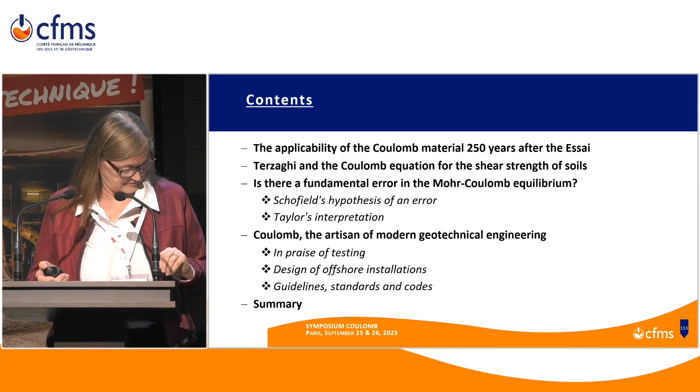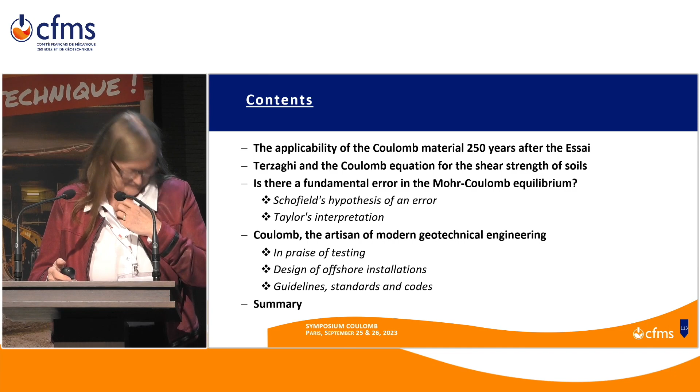So the plan of presentation: I will have a few words on the applicability of the Coulomb material 250 years after the essay, and how Terzaghi verified this. It's an old document that I found at NGI. Then I was always a bit disturbed by the fact that it has been published that there was a fundamental error in the Coulomb equation, so I will discuss this. And then finally, I call Coulomb the artisan of modern geotechnical engineering, with some examples or illustrations of where it's in our practice today.

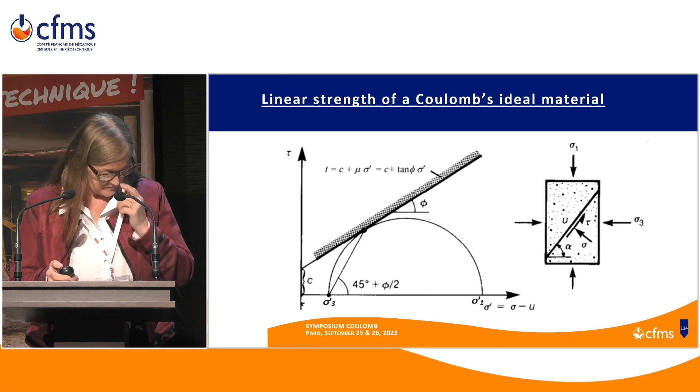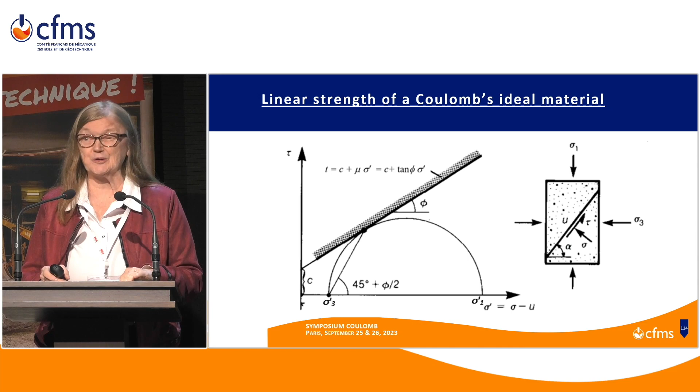So this is the basic Coulomb equation, and it's not an original figure, it's a fairly old figure you can see. And it's quite simple. It has cohesion, it has the friction angle phi. And the definition of cohesion, as it's given in physics, because Coulomb was a physicist, is the act or process of sticking together tightly, or it's the molecular attraction by which the particles of a body are united throughout the mass. So Coulomb was a physicist who discovered the laws that govern magnetic attraction and repulsion and invented the torsion balance.

So can he also still be shaping the geotechnical engineering of today? He presented his essay in 1773 on some statical problems. It's a happy coincidence, in a way, that this 250th anniversary of the Coulomb essay is also the 100th anniversary of the principle of effective stress that was proposed by Karl Terzaghi in his 1923 German version of soil mechanics. In English, it came in 1925.

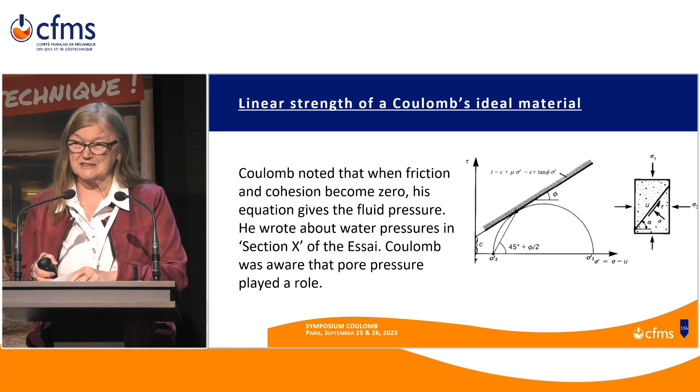And Coulomb noted that when friction and cohesion become zero, his equation gives the fluid pressure. He wrote about water pressure, although it's not in his equation, in section 10 of the essay. So he was aware that pore pressure played a role. But in those days, remember it's 1773, Coulomb did not have adequate apparatus for the measurement of cohesion or pore pressure, because Collin was the first to publish measurements of undrained shear strength in 1846, 75 years later.

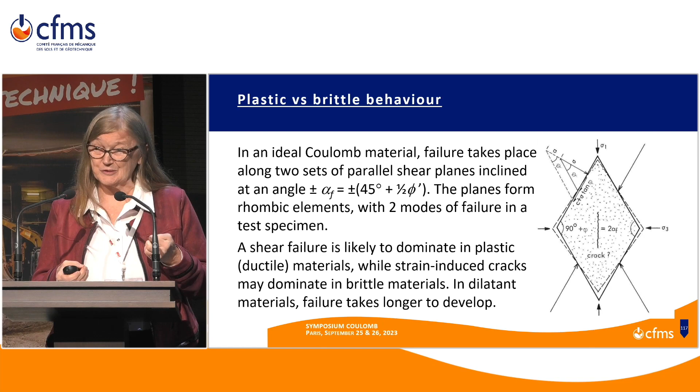So in an ideal Coulomb material, failure takes place along two sets of parallel planes, inclined at an angle, as shown here, alpha plus or minus 45 degrees plus half phi. The planes form rhombic elements with two modes of failure in a test specimen. A shear failure is likely to dominate in plastic ductile material, while strain-induced cracks may dominate in brittle materials. So in dilatant materials, failure may take longer to develop.

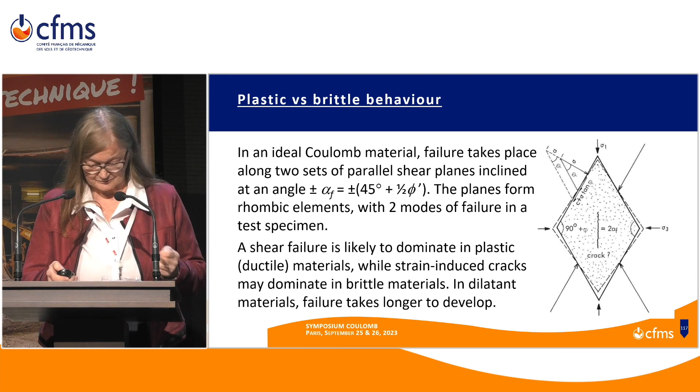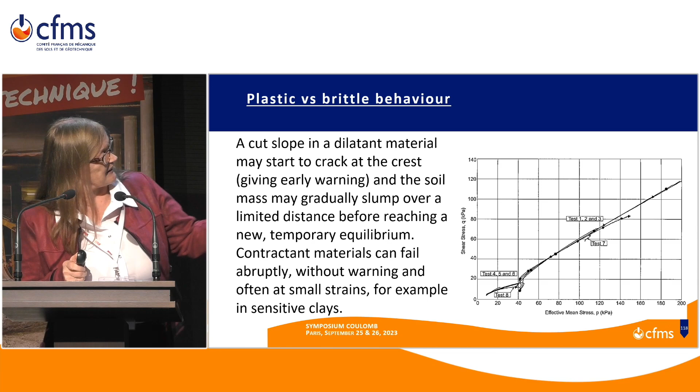This, I believe, is the precursor to our stress path shown here for contracting material. The contractive material is the one going down, the stress path going down, and the dilating material is the stress path going up. This is a modern test from around 1980.

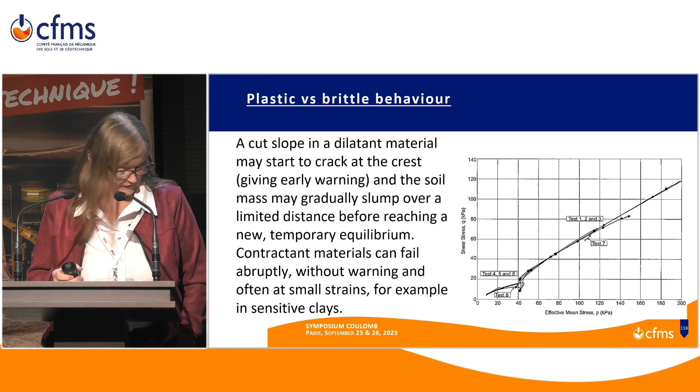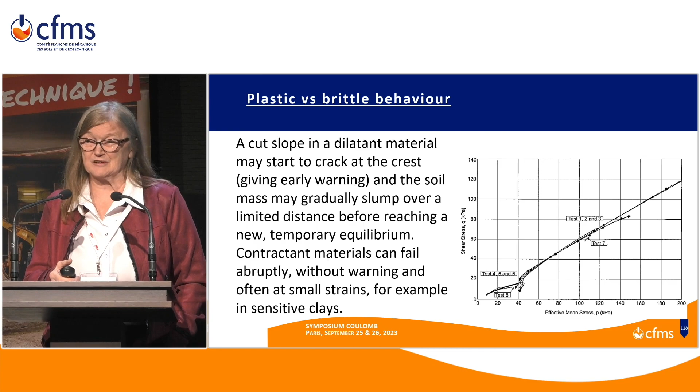A cut slope in a dilating material may start to crack at the crest, giving early warning, and the soil mass may gradually slump over a limited distance before reaching a new temporary equilibrium. Contracting material, on the other hand, can fail abruptly, without warning, often at small strain, for example sensitive clay. Coulomb already hinted about that in talking about his materials.

This is a landslide that occurred in Norway in 2020, where 10 people died. Definitively contracting material. I don't have to show you, but you can see the landslide which took so many houses. Already in the Coulomb theory, we could see the contours of modern geotechnics.

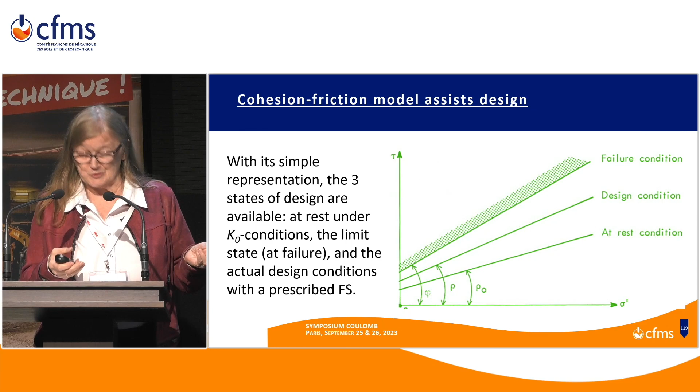The simple model of Coulomb is very useful just to see how things behave. So the three states of design in practice that we have are easily represented: you have the at-rest condition, which is the lower line, then the failure envelope, which is the upper line, and then the design condition. All of these are represented with straight lines. We know it's not exactly a straight line, but it's a very good tool to teach and to represent what is happening.

Now, Terzaghi, who we all know was a determined person, decided to verify the equation of Coulomb. This is data that we had at NGI from a course by Terzaghi in 1935, which you may know he legated all his material to NGI.

Bjerrum in 1959 found this and translated it from German to Norwegian, and I translated it to English. So this is data that has not been published before, which was very nice to find. That's the usefulness of libraries. Young people, libraries are great.

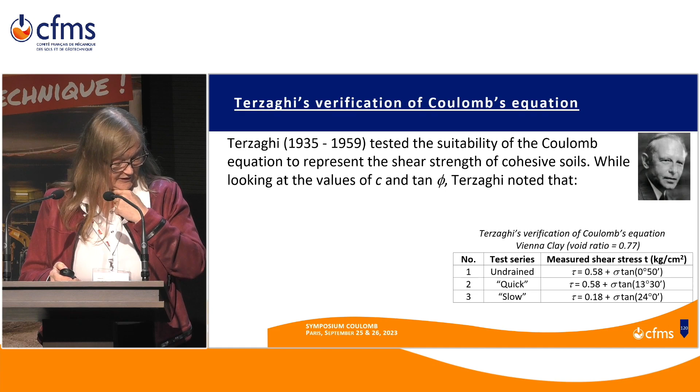He tested the suitability of the Coulomb equation to represent the shear strength of cohesive soil. These are the results he obtained, part of the result. He had three sets of tests: one completely undrained, one quick—like what we call the Q test, old-fashioned test—and a very, very slow test to represent drained condition.

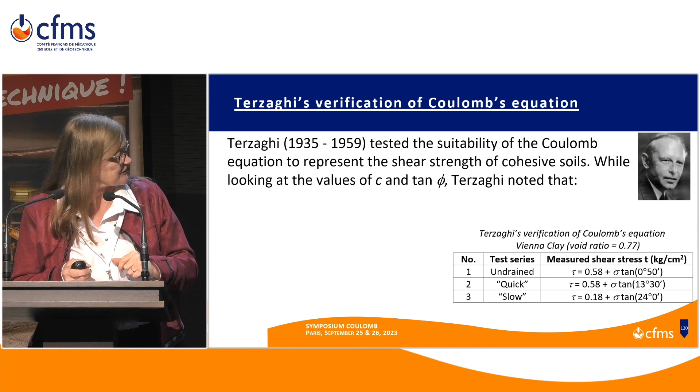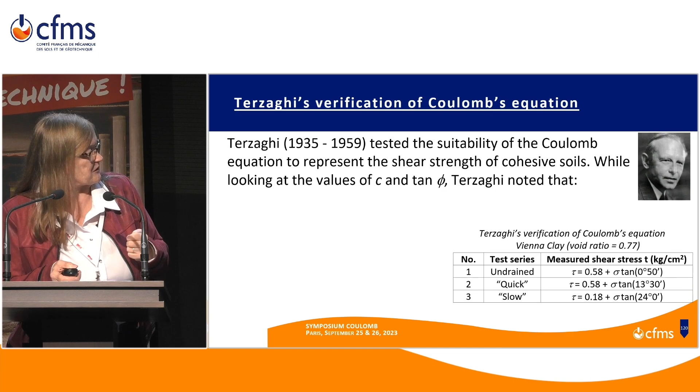Lo and behold, he obtained equations similar to Coulomb's. By this time, the T had become a tau and the S had become a sigma, but it's the same equation with different friction angle measures. In those days, they measured friction angle very precisely.

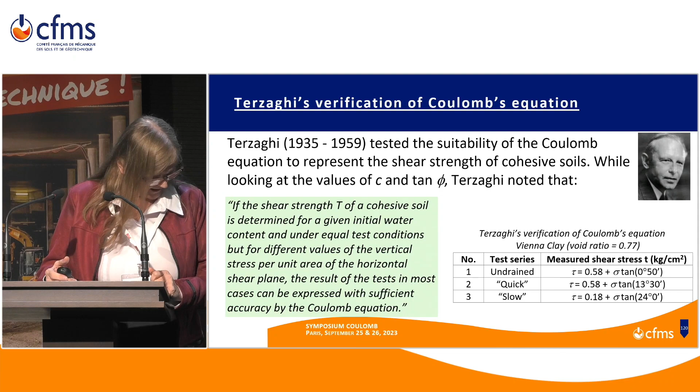Terzaghi noted—this is a quotation from his German report, translated to Norwegian to English—'If the shear strength T of a cohesive soil is determined for a given initial water content and under equal test conditions, but for different values of the vertical stress per unit area of the horizontal shear plane, the results of the test in most cases can be expressed with sufficient accuracy by the Coulomb equation.'

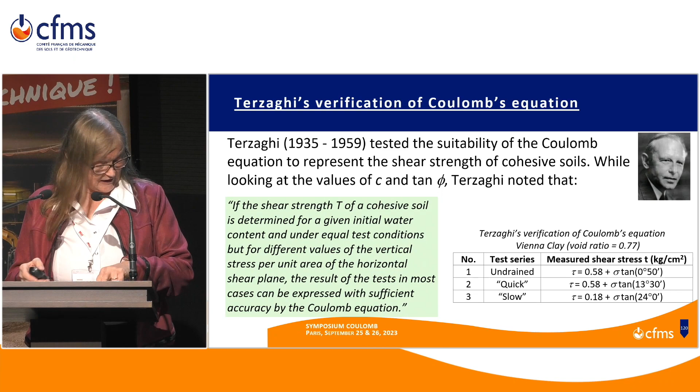So this was the verification by Terzaghi of the Coulomb theory. But now intervenes strength anisotropy.

Terzaghi observed that the most important difference in the tests was the extent to which the void ratio was allowed to adapt itself to the change in stress on the sample. If this adaptation was not fully completed, part of the force on the specimen was carried by the pore water pressure, or an increased pressure in the pore water.

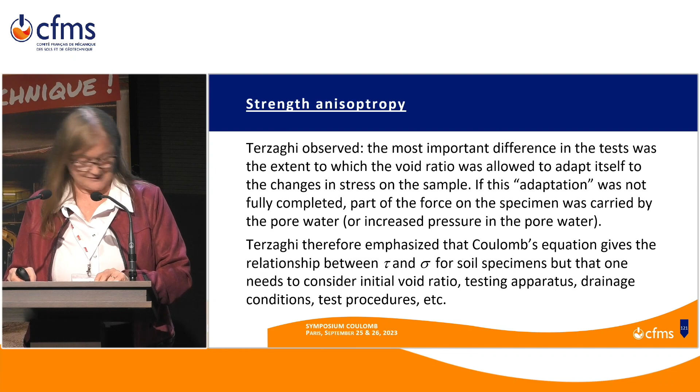Terzaghi therefore emphasized that Coulomb's equation gives the relationship between tau and sigma, or T and S, for a soil specimen, but that one needs to consider initial void ratio, testing apparatus, drainage condition, test procedures, etc., whatever else may come.

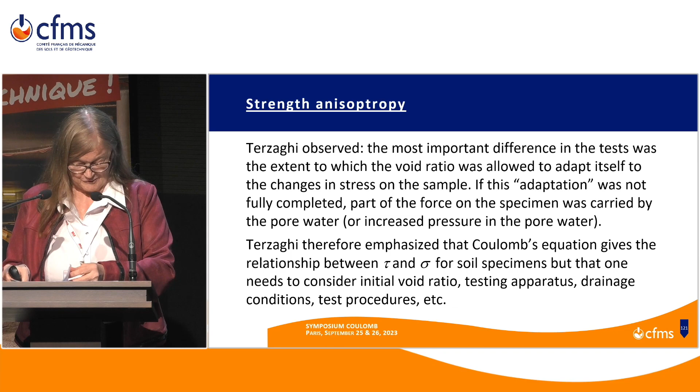Thereby, using Coulomb's law, Terzaghi introduced the concept of stress-induced and inherent anisotropy for clays already in the 1930s.

Coulomb provided the general relationship for shear resistance. The practitioner—you and me—the theoretical modeler, the researcher, they still have to determine which test conditions are the relevant ones. This is still true today, and this is probably one of the major mistakes we make in design.

Now that I'm older, when I mentor young people, I often ask them: how did you obtain the shear strength? And sometimes somebody answers me, 'Oh, I just got it from Wikipedia.'

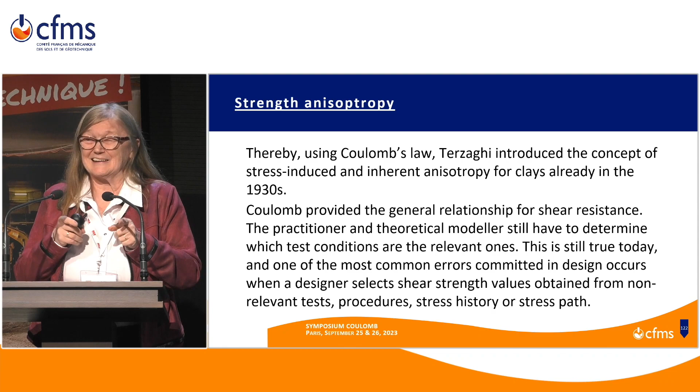So that didn't pass. But choosing the Coulomb values C and phi have to be related to what you're trying to model. It's important with the relevant test, the relevant procedure, and the stress history or stress path.

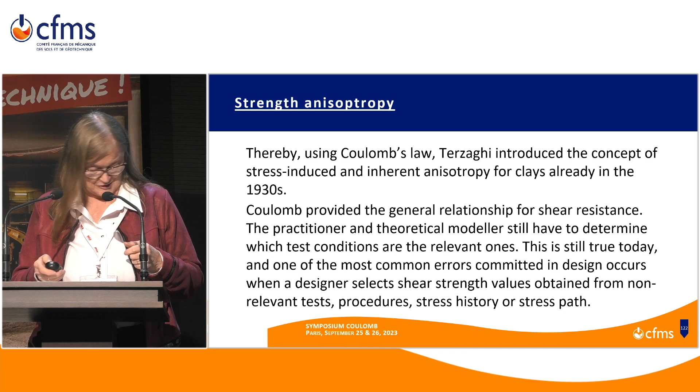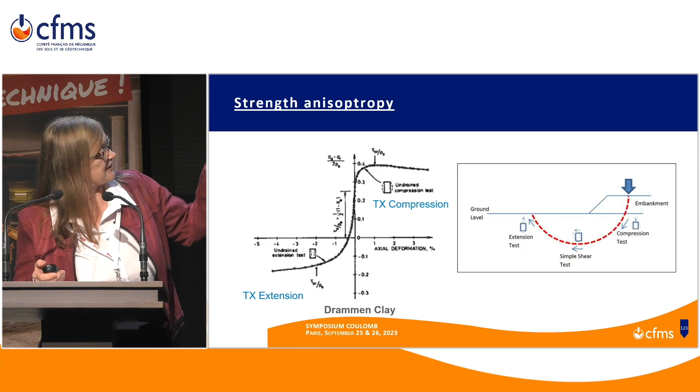And this is a very classical way of analyzing an embankment, where we model the circular slope failure in this case with the triaxial extension test, triaxial compression test, and simple shear test. They also follow Coulomb's law, but the parameters are not the same because of different stress paths.

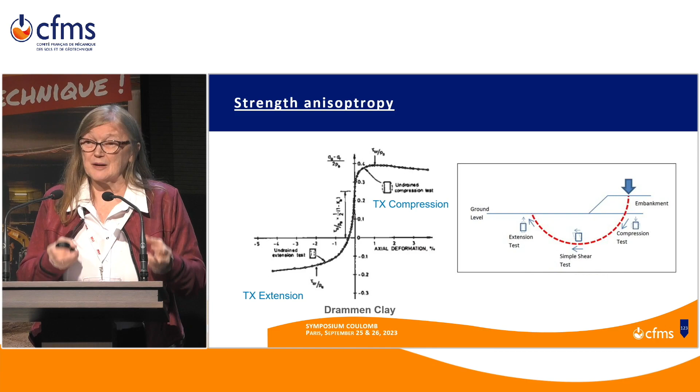Terzaghi in 1935 even suggested adding an index to make it very clear that the validity of Coulomb's equation depends on the conditions analyzed.

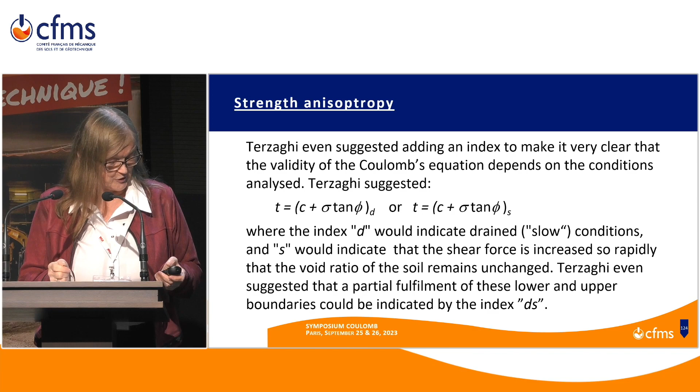Terzaghi suggested the Coulomb equation with a D would indicate drained or slow tests, and with an S it would indicate that the shear force is increased so rapidly that the void ratio of the soil remains unchanged. He even suggested an index DS for the condition in between.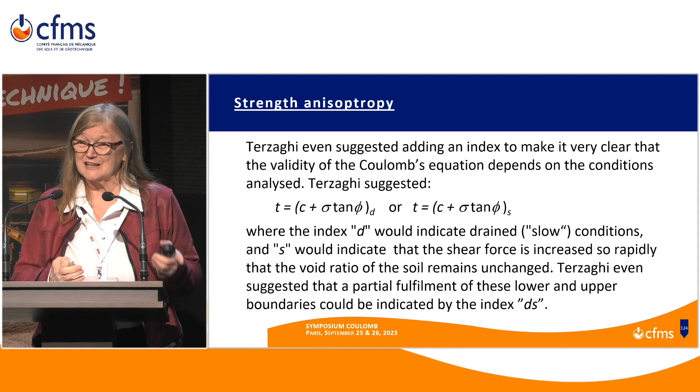Now, maybe the profession should have followed this, because today this is one of the things we often mix up in practice.

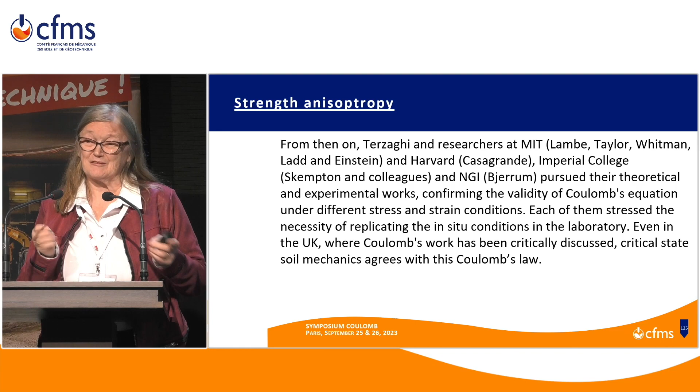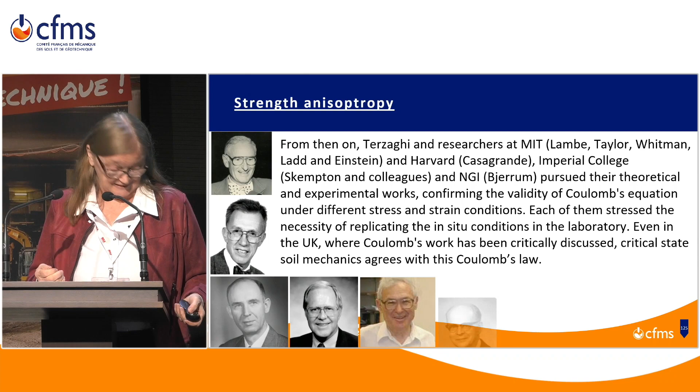From then on, Terzaghi and researchers at MIT—this is not complete, but I use my background, where I was educated and the people I talked to—so there was Lambe, Taylor, Whitman, Ladd, Einstein, and at Harvard, Casagrande, and then at Imperial College, Skempton. They followed these tracks and did a lot of experimental work to check or confirm the validity of Coulomb's equation under different stress and strain conditions.

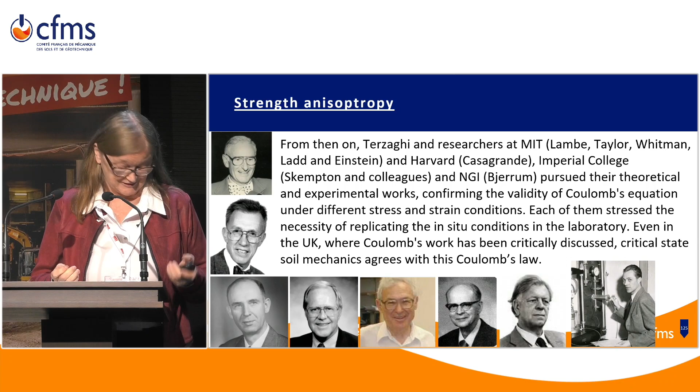Each of them stressed the necessity of replicating the in-situ condition in the laboratory. Even in the UK, where Coulomb's work has been critically discussed, which we will see afterwards, critical state soil mechanics agrees with this Coulomb law.

So I will look into it: is there a fundamental error in the Mohr-Coulomb equilibrium? I will present the hypothesis of an error, which was based on the Taylor text, what Taylor said, and then my own conclusion on the error.

Schofield, in 1998 and 2005 and other publications, suggested that the error rests on the observation that Coulomb's equation omits a component of strength called interlocking. The interlocking refers to the term mentioned first by Taylor in his 1948 book and in some lectures before that.

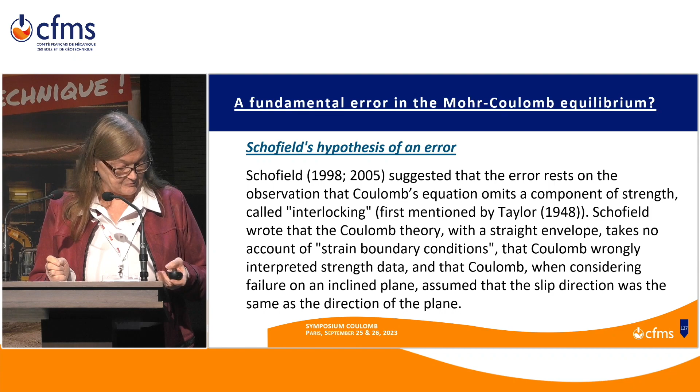Schofield wrote that the Coulomb theory, with a straight envelope, takes no account of strain boundary conditions, and that Coulomb wrongly interpreted strength data to get the straight line, and that Coulomb, when considering failure on an inclined plane, assumed that the slip direction was the same as the direction of the plane.

Schofield used as argumentation that Taylor's tests showed that the peak strength of the sand was equal to a combination of an angle of friction plus a term of interlocking. And Schofield added: mistaking interlocking for cohesion.

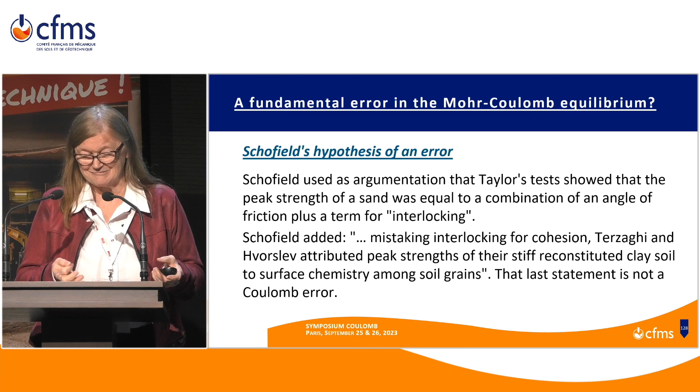Terzaghi later, and Hvorslev even later, attributed peak strength of their reconstituted stiff clay to surface chemistry among soil grains rather than real friction. But that last statement is certainly not a Coulomb error—it would be an error of Terzaghi's or Hvorslev's.

But what did Taylor say in 1948? This is a poor drawing, but it's taken from the original Taylor book, the very first, which was handwritten, where he illustrates his check of the Mohr-Coulomb line. And then you have the figure there, and below the figure is his original caption.

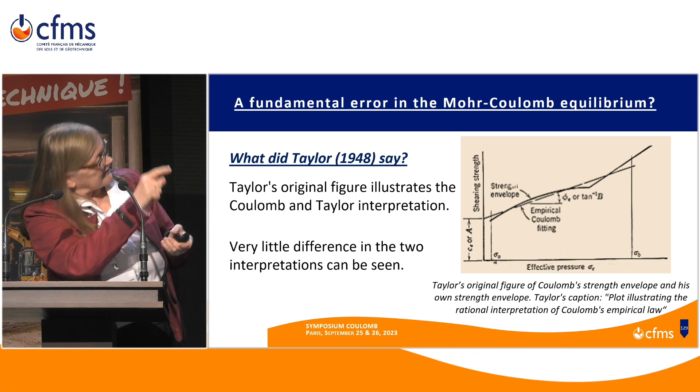He said: plot illustrating the rational interpretation of Coulomb's empirical law. The law by Coulomb is the dashed line, the straight line, whereas his test on the sand is a curved line that goes a bit up, a bit bizarre at the top. And I find the two lines are really quite close.

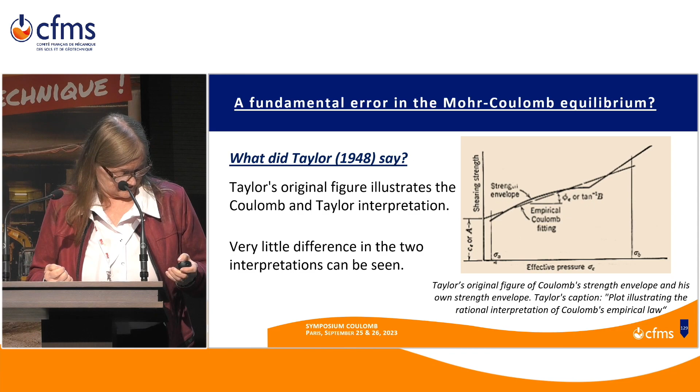So in his text, Taylor agrees with Coulomb. Taylor did not describe Coulomb's theory as an error.

On the contrary, Taylor called the Coulomb parameters empirical coefficients and mentioned that different conditions should be accounted for by the engineers using the Coulomb equation. He added: curves of the Coulomb type are representative of the strength of a given soil when it has been subjected to a given magnitude of precompression. At different depths in a deposit, there usually are different amounts of precompression, thus a different envelope may hold for different depths. So he was already talking of using Coulomb, but in a normalized manner in terms of effective stresses.

Okay, try this. Okay?

My interpretation is that Taylor's paragraph validates Coulomb's strength theory. There are two recent papers, one in 2015 by Christian Becker and one by Burland in 2008, and they reiterate the same. I've put their pictures here. You might not know them, but everybody knows John Burland. They reiterate that Taylor's concept of interlocking is not inconsistent with Coulomb's theory, but complementary. It's a sign of progress.

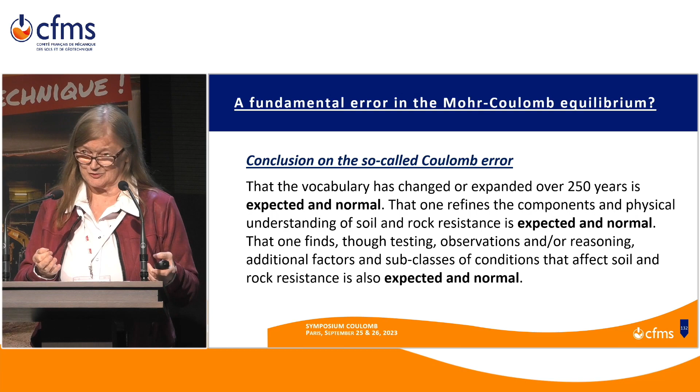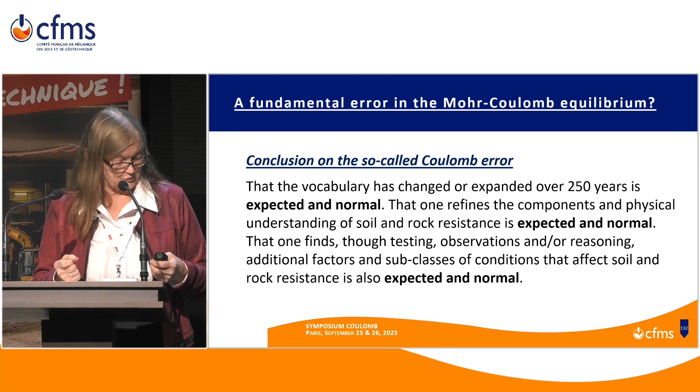So my conclusion on the so-called Coulomb error is that the vocabulary has changed or expanded over 250 years, which is expected and normal. That one refines the components and physical understanding of soil and rock strength and resistance is also expected and normal—it's 250 years, we have to do some progress. And that one finds through testing, observation, or reasoning additional factors and subclasses of condition that affect soil and rock resistance is also expected and normal.

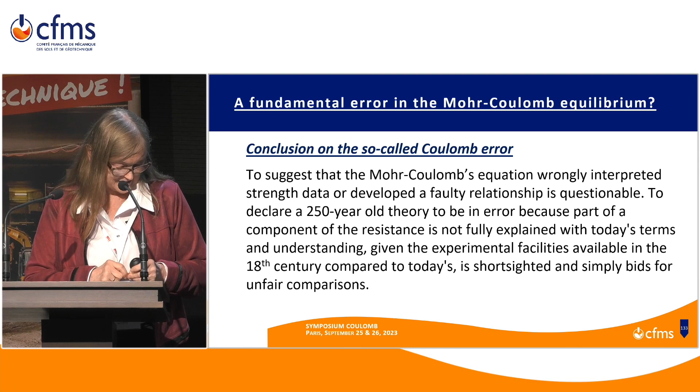So to suggest that the Mohr-Coulomb equation wrongly interpreted strength data and developed a faulty relationship is, in my mind, questionable. To declare a 250-year-old theory to be in error because part of a component of the resistance is not fully explained with today's terms, and the understanding has changed, and given the experimental facilities available in the 18th century, I think is not a fair assessment of what Coulomb said in 1773.

Another conclusion I have is that Coulomb's principle was the precursor for developing the tools to meet the engineering profession's responsibility of ensuring the safety of people and preserving material property and the environment. Through Coulomb's theory, the engineer can become intimate with the foundation soil and continue to rely on experience and peer review.

And simple hand calculation—I'm all for finite element, etc., but with this you can do some simple calculation and check that you're in the right order. So in my mind, Coulomb, without doubt, laid the groundwork for the understanding of soil and rock resistance.

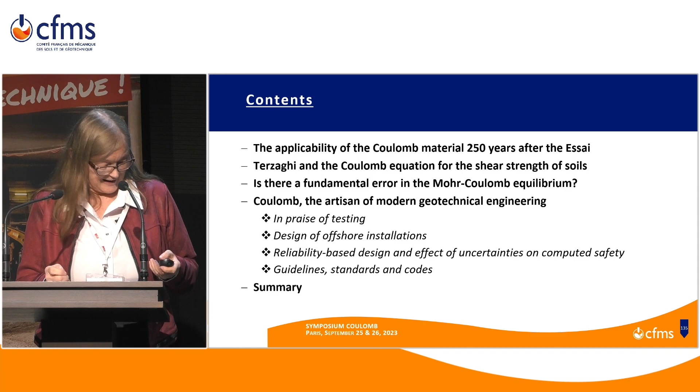Now, just a few examples of how Coulomb is influencing today's practice. Well, the profession has greatly evolved—100 years after the statement of effective stress, and the principle of effective stress really changed soil mechanics.

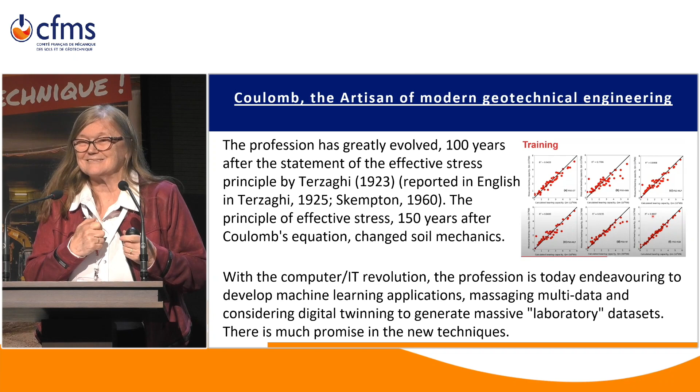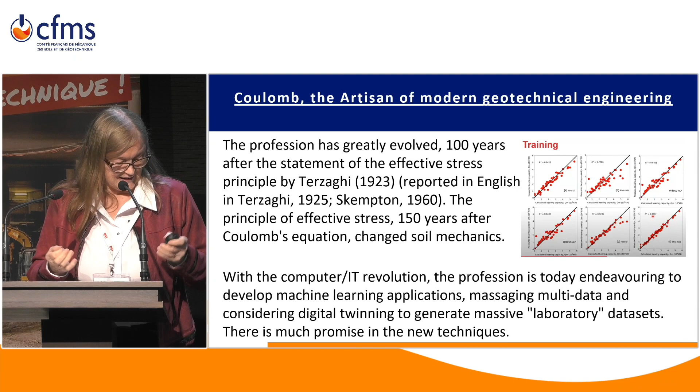With the computer and artificial intelligence revolution, the profession is today endeavoring to develop machine learning applications and massive multi-data sets and everything. I myself am involved in that. There's an example of training a machine learning model—that's all right, but still it's not the whole story. The data will still have to observe Coulomb's law.

The profession is undergoing a paradigm shift from dedicated verifiable data towards vast numbers of measurements in anonymous distributed systems, like for example digital twins in the laboratory. These new developments will be helpful, but the fundamentals must not be forgotten. So observing Coulomb's principle remains an absolute requirement for the teaching and practice of engineering. Fundamental understanding should not take a back seat to numerical development and AI interpretation. I'm not against it, I just say you have to also keep the principles.

So Coulomb's equation has found applications in everything we do. I've taken four examples, and the first is in praise of testing, laboratory and in-situ testing. Coulomb was an experimental scientist. He wrote about friction and cohesion, and he also wrote that only experiment can help us to decide the reality of the different causes of shear resistance.

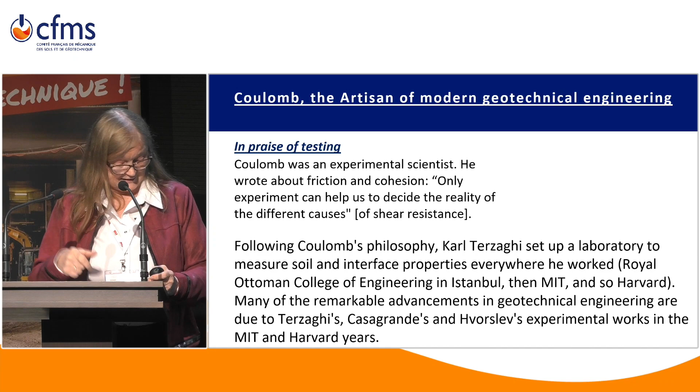We can't compare, we can't with justice say Coulomb was wrong when we can use such facilities. So, but if only clay deposits could talk, like the Atchafalaya clay, that's a very soft clay in the United States, and the New Orleans flood protection levee foundation, or the sensitive clays in Norway, in which you saw a landslide, they would tell us how important it is to thoroughly understand the geology and the stress history of a deposit, and then apply Coulomb's equation.

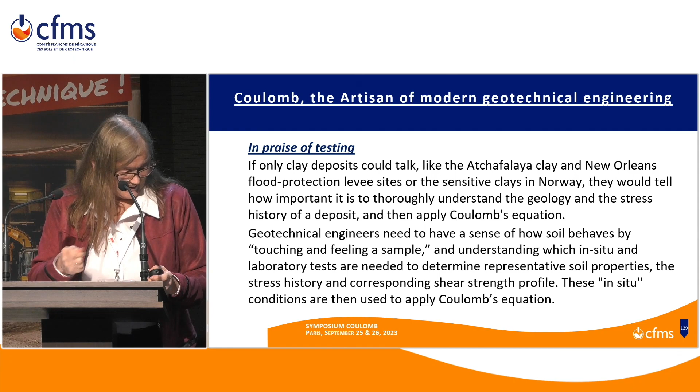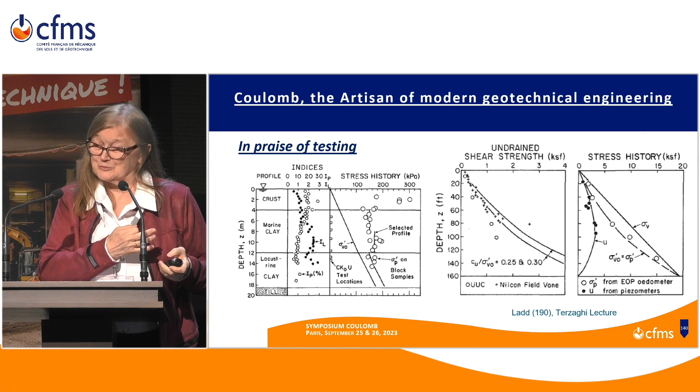So I took an illustration from Chuck Ladd, who was my advisor, from his Terzaghi lecture, where he very carefully plotted all the data by hand, and then looked at the stress history, the effective stress, and what was the pre-consolidation stress, and then interpreted the shear strength profile. And that, I think, is good practice, even with all the good things we do with the computer.

The second aspect, design of offshore installation. You may not know, but I've worked many, many years with offshore structures, the gravity base and the pile foundation, and now with windmills. And the yield stress design of Coulomb is also part of the solution for newer foundations like these, although many new factors come in, but that's all right. That's the advancement of our science.

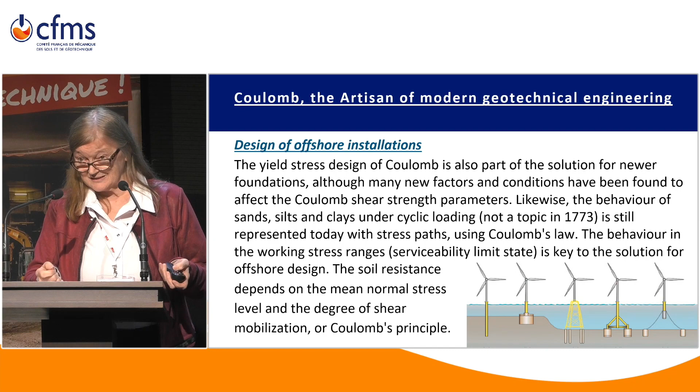So the behavior of sand, silt, and clays under cyclic loading, it was not a topic in 1773, but is still represented today with stress paths, with C and phi, and we use Coulomb's law. The behavior of the working stress range, what we call serviceability limit state, is key to the solution for offshore design. And the soil resistance depends on the mean normal stress level and the degree of shear mobilization using Coulomb's principle. And it's probably difficult to read, but there's a part in the essay that I believe is the precursor for reliability-based design and the effect of uncertainties on the computed safety.

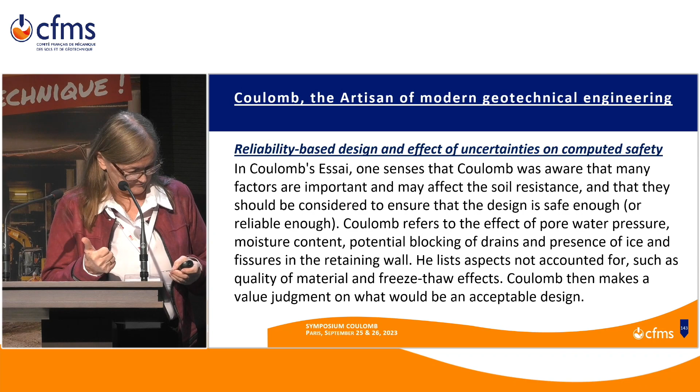So this is an excerpt of a translation by Heyman in 1972, and I have taken some parts of it. In his essay, one senses that Coulomb is aware that many factors are important and may affect the soil resistance, and that they should be considered to ensure that the design is safe enough, or today we would say reliable enough. Coulomb refers to the effect of pore water pressure, moisture content, potential blocking of drains, that's very important for landslides, presence of ice and fissures, it was for a retaining wall.

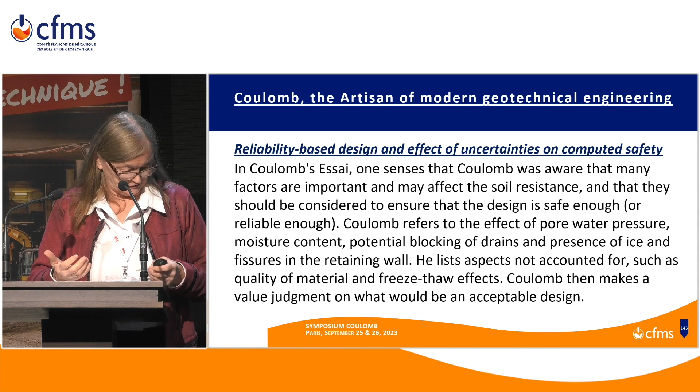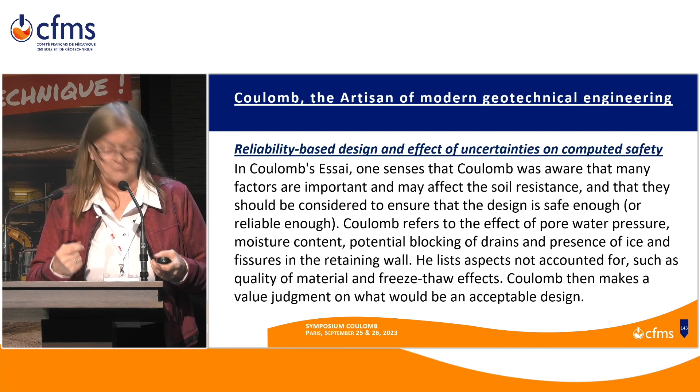And then he also lists the aspects that are not accounted for, like the quality of the material that's recovered, the freeze-thaw effect, and even the model that's used to calculate it. And that's in 1773. So if you read the text, he's already talking about reliability and how good is your calculation. So in his method, Coulomb makes a value judgment of what should be an acceptable design.

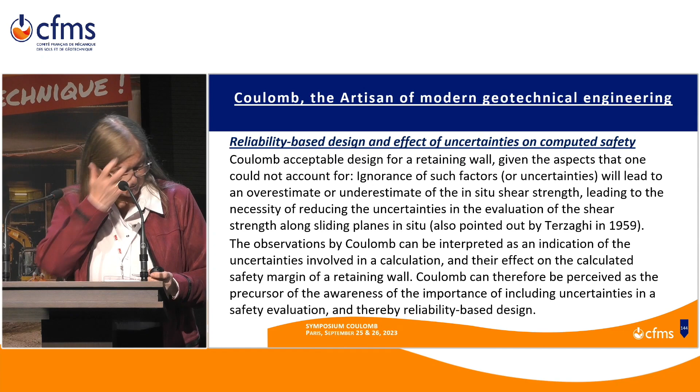So his acceptable design, given the aspects that one cannot account for, ignorance of, or uncertainties, that would lead to an overestimate or an underestimate of the in situ shear strength, and then leading to the reduction of the uncertainty for the safety factor. The observation by Coulomb can be interpreted as an indication of the uncertainties involved in the calculation and their effect on the calculated safety margin of a retaining wall.

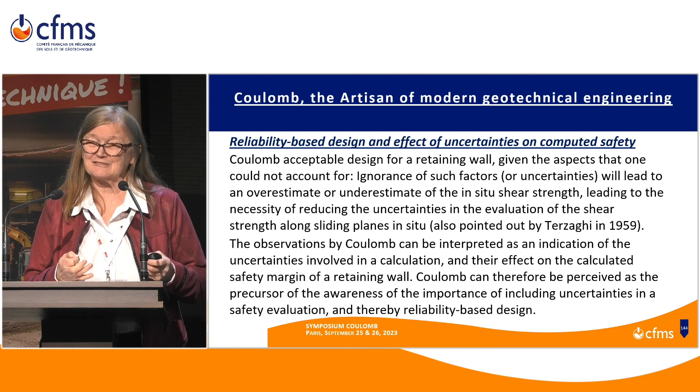So, at least as I read the document, I find it a confirmation that they knew that there were many other things that one should account for. And I am very impressed because that's what we're trying to convince clients about when we do reliability design today.

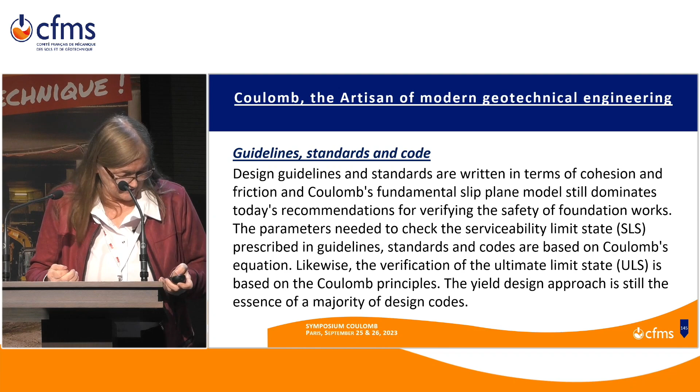And in standards and guidelines, they also use many of the concepts of Coulomb, and many of the requirements are expressed in terms of friction and cohesion. Naturally, they say you have to look at the stress system, whether it's a horizontal failure or a 45-degree failure. But that's all right. Coulomb gave us the first idea, and then we completed it with new knowledge.

Ce mémoire n'était d'abord destiné qu'à mon usage particulier - only for me, says Coulomb - dans les différents travaux dont je suis chargé par mon état. Si j'ose le présenter à cette académie - he wanted to give his knowledge to other people to move forward with it. So I think that was very noble.

So the value of Coulomb's work lies not only in the groundbreaking discovery he did in the 18th century, but mainly in the development to which this discovery led us over the next 250 years. All the work that we've done is a consequence of him stating the equation first. He probably did not foresee the significance of his work for an entire branch of civil engineering and for resource and infrastructure development on a worldwide scale.

So his objective was to share the knowledge and hope that it would come to use to someone who in the future would be likewise interested, like him. And that's again us, so he was talking to us. So I find that Charles-Augustin Coulomb in his essay reached his objective.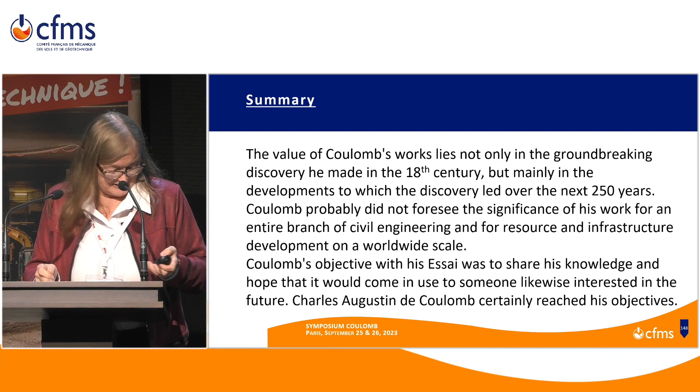Naturally, he could not imagine that we would be installing 400-meter high offshore structures, or suction anchors moving 40 meters into the ground, or very elegant bridges and long underwater tunnels. Maybe he would have been scared by these developments. But at least he provided us the tools so that we could work with to do these developments today.

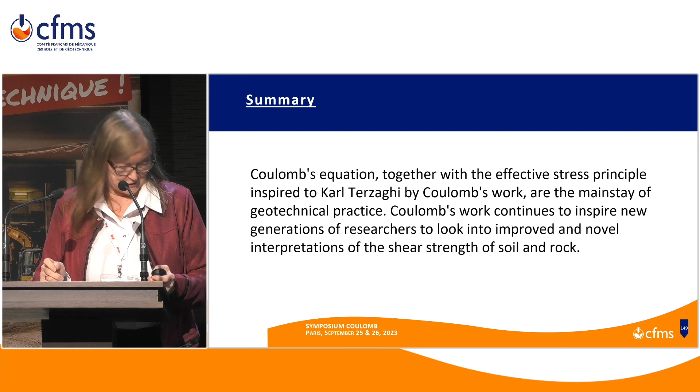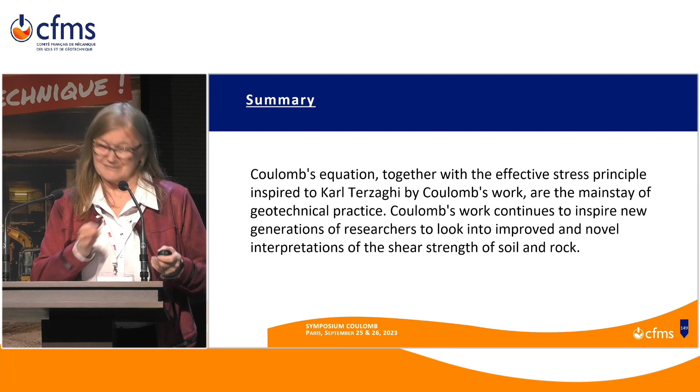So Coulomb's equation, together with the effective stress principle inspired in Karl Terzaghi by Coulomb's work, are the mainstay of geotechnical practice. Coulomb's work continues to inspire new generations of researchers to look into improved and novel interpretations of the shear strength of soil and rock. We will find more things in the future, and that's fine, but we will still rely on Coulomb.

Coulomb's contribution to the design of structures deserves the attention and recognition it has received. There have been new developments since, but the origin of the understanding was with Coulomb's equation. That the profession discovers limitations, additional influential factors, extensions, does not invalidate the theory - rather it validates it and accentuates the outreach of the yield design approach in his 1773 essay.

So in closing, Gustave Eiffel named 72 engineers and scientists in the Brotherhood of the Eiffel Tower. We were just beside it yesterday - it's on the first floor, first level. Eiffel wanted to outline the importance of teamwork and cooperation in engineering. That's what he wrote: the 300-meter high Eiffel, built in 1889, is a triumph of human ingenuity and engineering collaboration.

Eiffel did not think of the tower as his own. When Eiffel dedicated the tower, he recognized the many contributors to French science and technology during the past 100 years. He put 72 names on the side of the tower on the first level. Unfortunately, I don't have a picture of that, but the first time I go to the Eiffel Tower, I'm going to take a picture. But who were those scientists chosen by Eiffel to be members of the Brotherhood of the Eiffel Tower?

2 were agronomists, 6 astronomers, 9 chemists, 4 industrialists, 1 geographer, 15 civil engineers - hooray - and 17 mathematicians, oh that's good too, 2 physicians, that's just the medical doctors, 2 mechanical engineers, 2 mineralogists, 1 biologist, and 11 physicists.

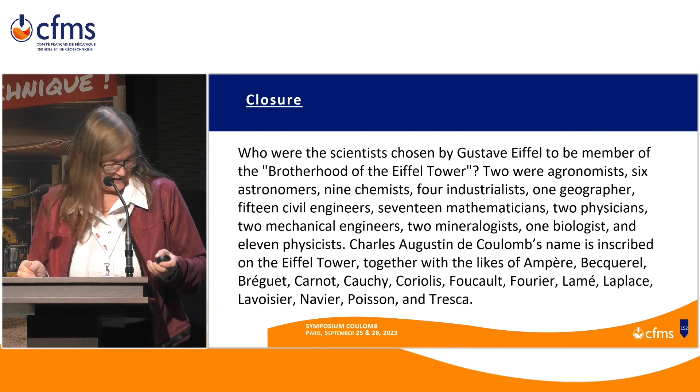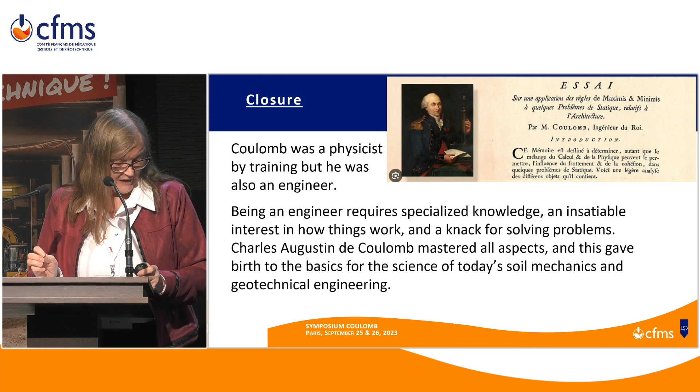So Coulomb was a physicist by training, but he was also an engineer. Being an engineer requires specialized knowledge, an insatiable interest in how things work, and a knack for solving problems. Charles-Augustin Coulomb mastered all aspects, and this gave birth to the basis for the science of today's soil mechanics and geotechnical engineering. So we should be thankful that he showed us the way.